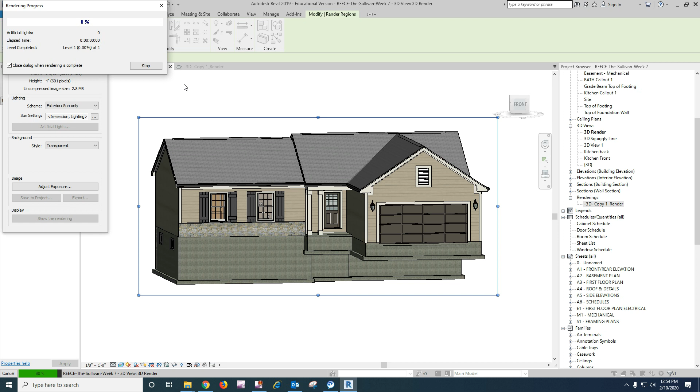Now I'm gonna go draft just because I'm running the video here, and I want to see how the background looks with that transparent setting. Okay, so transparent leaves us this checkerboard background. I don't know how that's going to look.

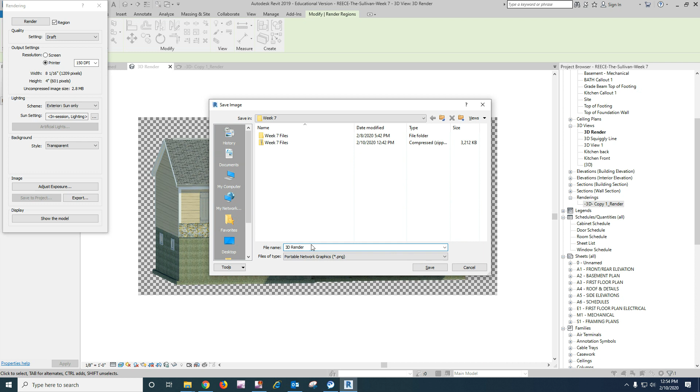I want to save that, but I guess it won't save because I'm in draft mode, so I'll have to export it and bring it in. But if you run it with white, which is what I've done in the past, I've chosen color and just made it white, and then you have a white background.

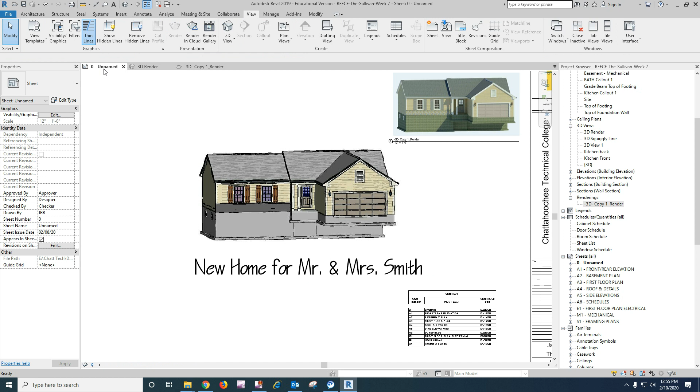Now I want to show you what's happening when we go to our drawing. We're gonna set up a cover sheet. It'll be sheet 0. Scale is not important. I didn't get a name on it over here. Cover.

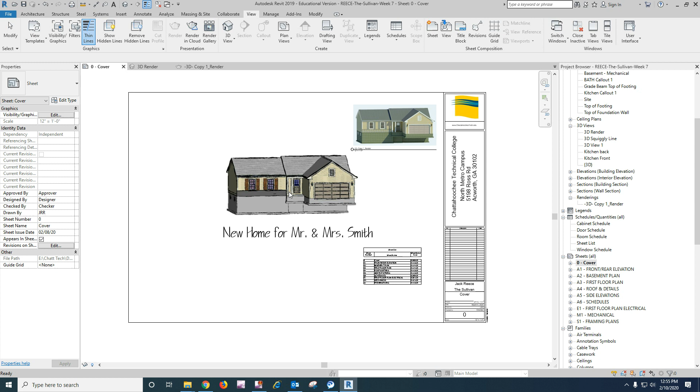All right, so here is the first rendering that I did, and I used a white background, but I adjusted the exposure to darken it a little bit, since it was kind of bright. So you can see the white background isn't white once you darken it.

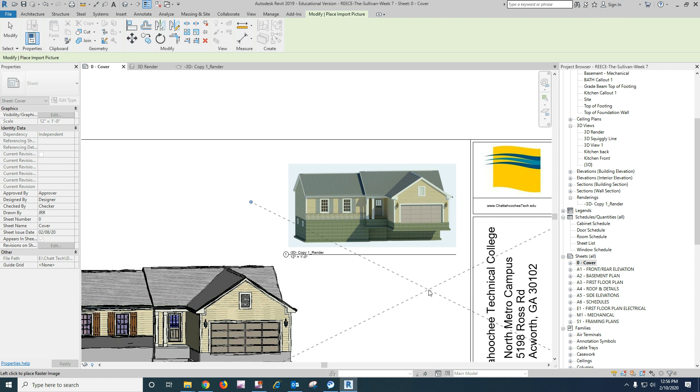So let me bring in... okay, so actually, it's in draft mode, but the transparent background actually worked out pretty good on the paper. So that would be a better way to go. You just have to try your different modes, because I remember last semester we had trouble with the interiors, I think it was the kitchens, on high quality.

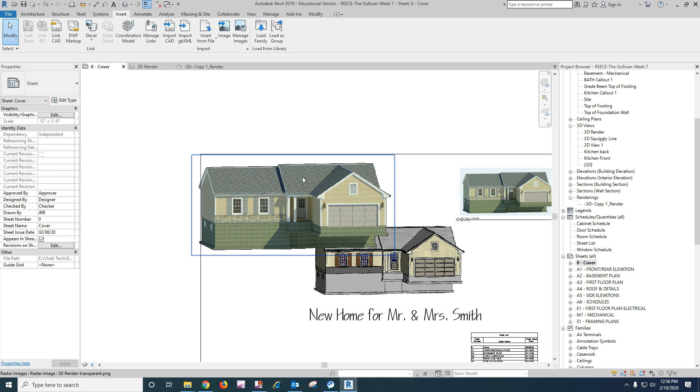But okay, that's a couple of things. What I want us to do on our drawings is this, and that's what I want you to put on your drawings. We can do these all day if you want, but I don't want that on the drawing. I want you to do this because it's different, and it's something I figure you need to experience.

So what I did, I created a 3D view, and I left it at shaded mode for my visual style. And I go to graphic display options, and under sketchy lines, I enabled it and played with these a little bit. I think this looks okay for what we're going to do. So I did a 4 and a 2. And of course you can adjust lighting and shadows and all of those things.

Exterior sun, okay, and you can play with these here. All right, so that gives me shadows. I don't think in this case shadows is going to look good, just my opinion, so I'm going to turn shadows off. Show ambient shadows instead. Let's see.

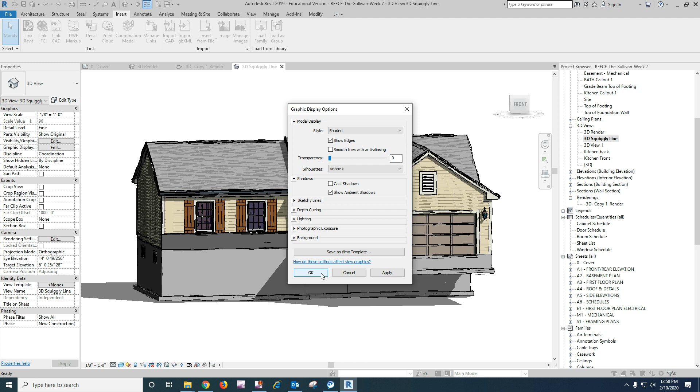Nah, I don't think that looks good either. I'm gonna leave it like that.

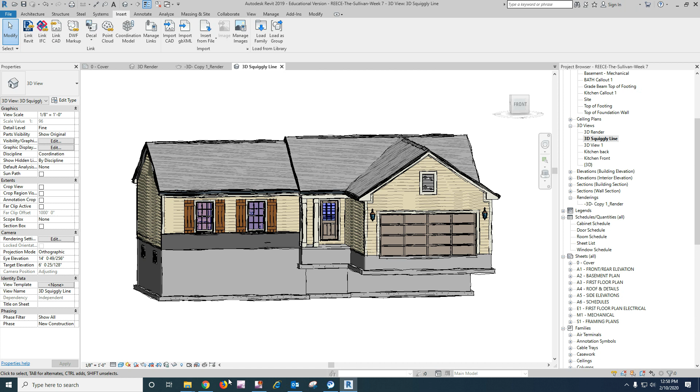Okay, so I did that, and then what I did is I just did a screen capture using my snipping tool, did a screen capture of the thing, and you know how to do that. Then I brought it in as an insert image and dropped it in my paper, and I actually resized it up just a little bit to give me that look.

I did a 1-inch text here, and then we're going to do a sheet schedule, and I'll walk you through that. Okay, I got a few more minutes left on here.

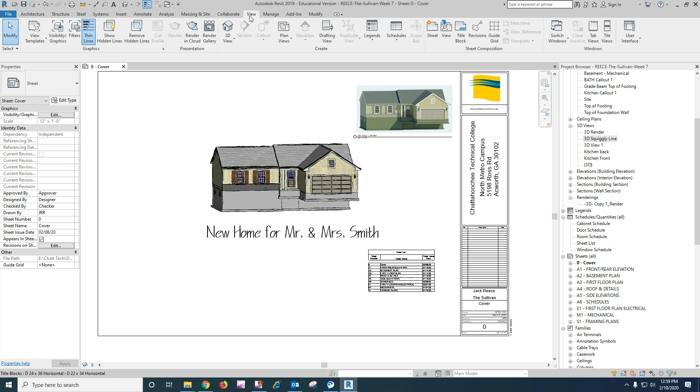Close those down. So to get your new schedule, excuse me, I'm bumping around here. It is under View. What am I thinking? Okay, so we go Schedules and you go Sheet List.

Here's what we're going to bring in. We want sheet number, sheet name, and then sheet issue date. That's what we're going to start with for right now.

But we're going to make some changes because we need to be able to sort and order this thing, so you can go ahead and create it. That's fine. Let's go to Manage, Project Parameters, and we want to add a parameter.

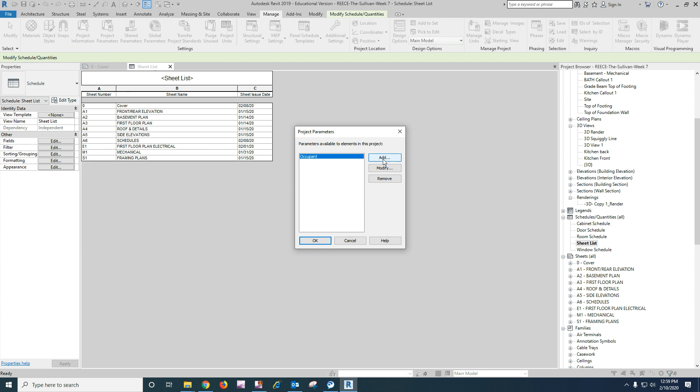And I am going to call it Discipline Order. Okay, it's a common parameter, and the type of parameter is going to be text. Okay, and identity data, text. That's good. Instance, okay.

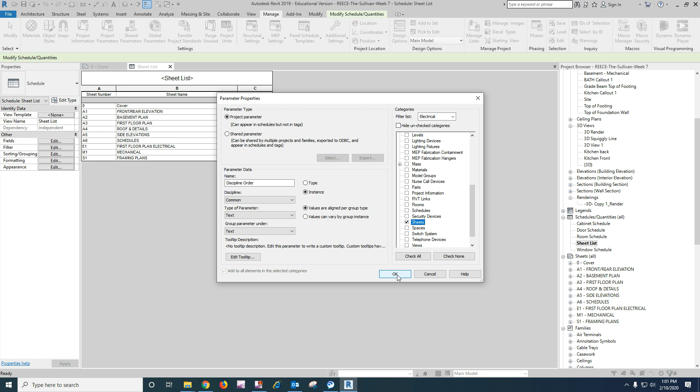And then over here, we want to apply it to sheets. I'm looking at my notes. Okay, yeah, sorry, it is going to be an instance. And for categories, we want to check sheets. And then we're going to go OK, and then OK out of that.

Now we want to include that field in here. Okay, and then what we're going to do is we're going to put in our discipline. So our cover sheet, we can type it in here, or you can go back to the sheets and add them. Here it's easier. So here I'm going to go 1 for general, because I want that to show up first in my sort.

All my architectural sheets, I'm going to call them 2, architectural, and I'll apply that to those.

Okay, let's see what comes next. Structural comes next, so we'll go 3, structural. Mechanical comes next. Oh, duh. And electrical comes, oh dummy, 5. There we go. Okay.

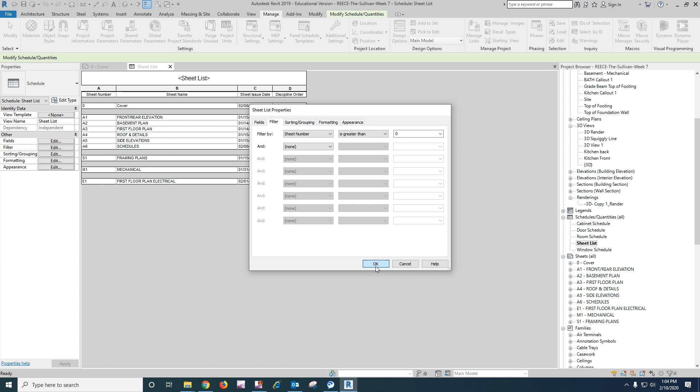What happened? Oh, it's greater than or equal to, I hit the wrong one. It's greater than. Okay, sorry about that. So we don't really need the cover sheet in our index.

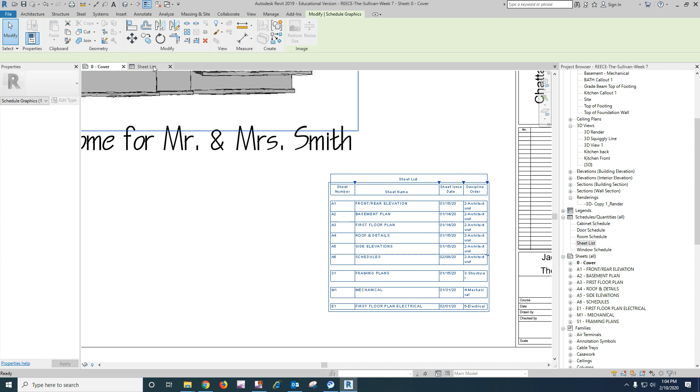And so that's got our sheet list set up, and so you'll bring it into your drawing, and then we want to, oh sorry, we're going to hide that column. So let's come back to here, select column D, and we're going to hide it.

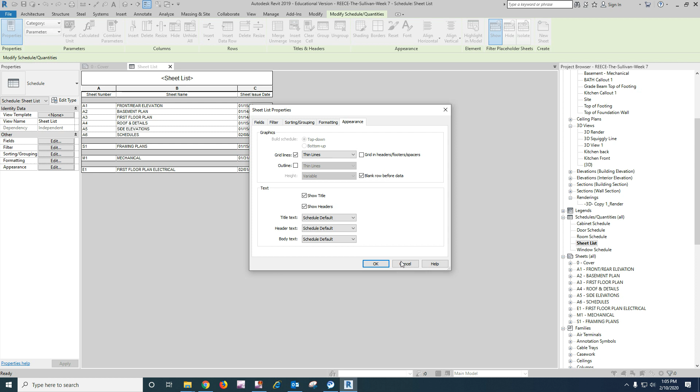It's still in there, as you can see, it's still in there, and we can work with it. And that, this, anyway, so I just wanted to hide it because there's no need to show that here. And then if you need to resize any of these column widths, resize them. Okay, so that gets our.

We don't need that view in here. So that kind of gets our cover sheet set up for right now. We may play with it a little bit more before we print and see what we need to do, but that's it.